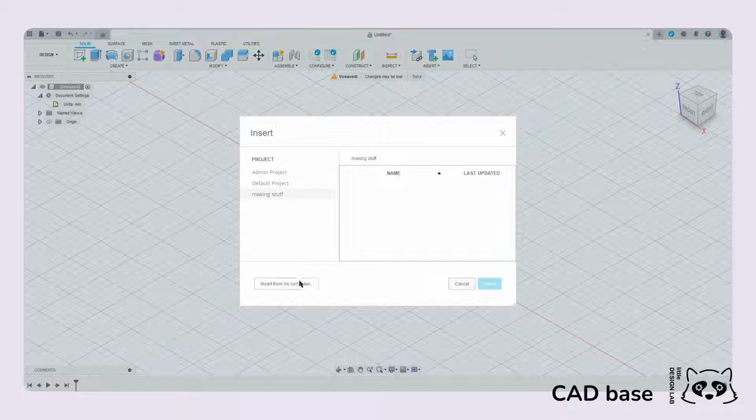In order to start our CAD model, the first thing we're going to do is bring in the sketch we did before. I took a screenshot of it earlier, so I'm going to insert it so we have something to reference. I'll leave it off to the side because I don't want it to interfere with my main drawing. Now we have our drawing to work off of.

Like most things in Fusion, what we're going to try to do is start with a sketch. We'll extrude that sketch into a solid, and then modify that solid further to get the full geometry of the part we want. So let's start with the basics: a basic outline of our waffle knob, working on getting the geometry of the base and the pointer to what we want it to be.

So let's start with our sketch. Again, I want to work on my XY plane. That brings me to this orthogonal view, which is nice, and I can start drawing. I'm going to start with our circle, using my origin as the base.

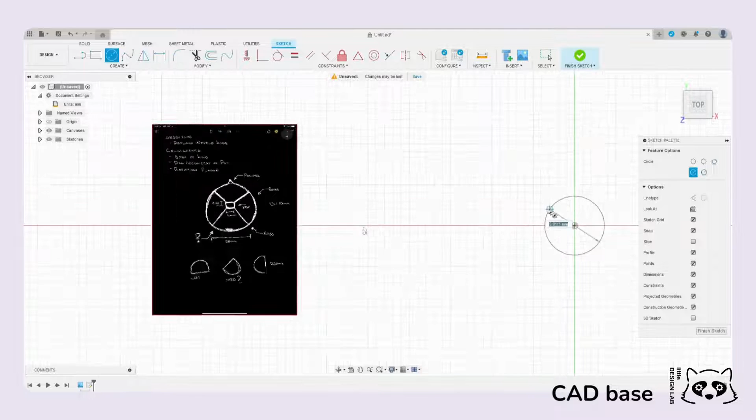Typically, when working parametrically, we don't want to specify all these dimensions up front because we can get too constrained. However, because I already know what dimensions this is going to be, I'll just go ahead and set it, so it's set and we can sort of forget it for now. It's 28 millimeters, we'll leave it at that. Of course, because it's parametric, I can always go back and change this if I need to, but since we know the dimensions, we'll leave it as is.

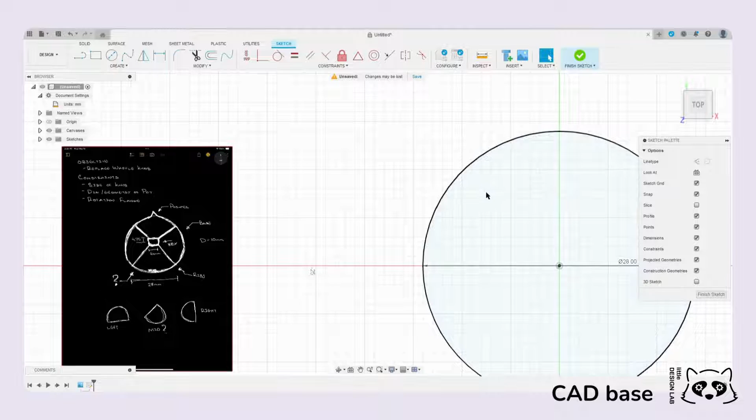The next thing I'm going to work on is making this pointer. I'll start with a reference line, because everything is going to be symmetrical, I need this just to help keep things organized. Right now this line is set as a normal line, so I'm going to change it to a center line. That way I can reference it, but it doesn't get in the way of my geometry, which is exactly what I want.

Right now there are a couple of constraints applied to this: a vertical constraint that keeps it straight up and down, and a coincident constraint to keep it attached to the circle. If I move this, you can see it still moves back and forth, which is fine if that's what you want, but I want to make sure this stays in line with my center point. So I'm going to add one more constraint and make these all coincident to each other. That way, now that they're coincident, I won't be able to move these things back and forth, so they stay in line with one another, which is exactly what I want.

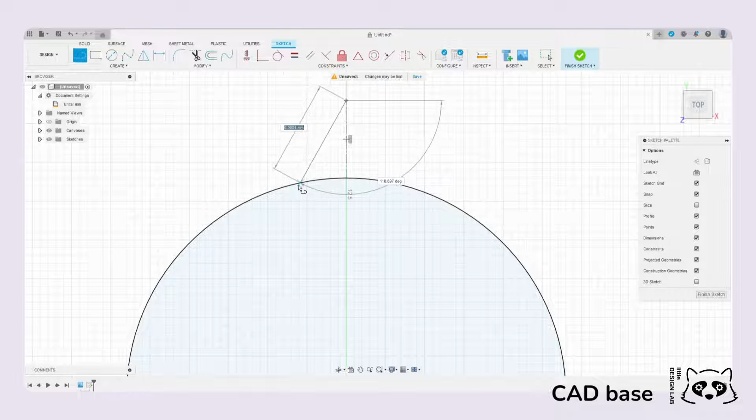With that done, I can add one arm of my pointer. I'm going to snap it to my point here so that it refers to that, and also snap it coincident to this circle so it follows the circle regardless of what dimensions I end up changing it to. And there we go. Now I can change this up and down, move it back and forth, and it'll stay attached to the circle, which is exactly what I want for my pointer.

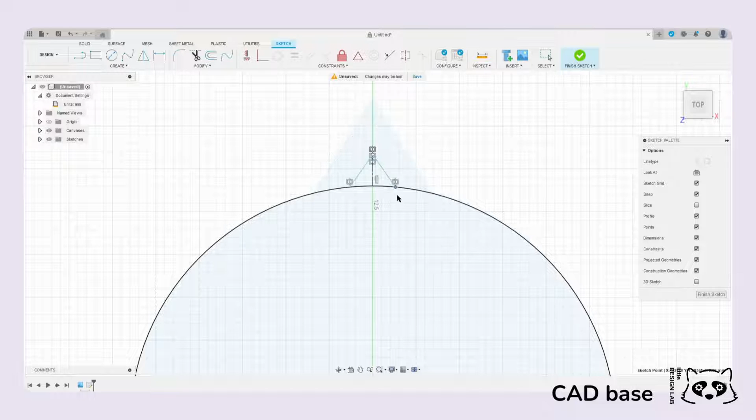What I do to one side, I want to do to the other side. So this is part of why we have the center line. I'm going to select my line, mirror it, and select the mirror line that I want. And there we go. Now I have a perfectly mirrored pointer, which again, you can see they added a bunch of automatic constraints for me so that if I start to move these points back and forth,

it automatically keeps it all in place for us, right? Which is great. We could just sort of leave it at that and be done. But there's a few more things that I actually want to do just to give me a few more settings and a little bit more control of what's happening. Sure, I can just go back and adjust these things by eye if I wanted to, which is perfectly fine for if that's what you want to do. But I want to try to add a few more features to this to just give me a little bit more control.

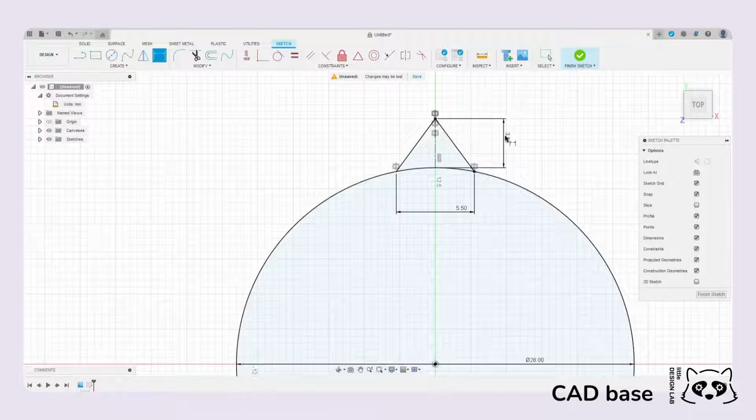So the first thing that I want to be able to do is control the height, or specify the height, and I also want to be able to specify the width of these things. So what I'm going to do is add another measurement constraint here, right? That allows me to then specify exactly what dimension I want there. I also want to specify the width, and now I can go back and adjust it based on exactly how high, how tall, or how wide I want this to be, and make those adjustments as we go along, okay?

One more thing that we're going to do before we extrude this. Right here, we have these very sharp points. For the most part, because this is a relatively small part, it's probably not going to matter that much. But typically, I do like to fillet all these corners because it just makes the geometry a little bit nicer to work with.

So what I'm going to do in order to actually fillet that, I need to trim this part out. That way it knows where to start and begin that fillet. So I'm going to break this circle into a couple of parts there, and change that and break that. And so now we have these two pieces. I'm going to convert them into construction lines because that's just what they are now, my construction lines. And now I can go ahead and fillet these two corners.

Fillet this corner here and fillet this corner. Let's say 1 is fine, maybe 1.5, we'll make it a little bit bigger. And so it's nice and smooth across there. I'm going to do it for this side as well. Fillet this corner here, fillet this corner here.

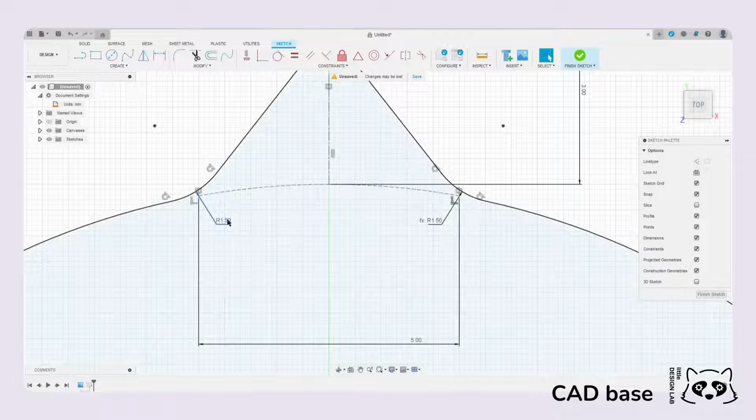You can see that these two are actually two different dimensions right now. I'm going to leave it as two different dimensions because I'll show you there's probably a better way of doing this, but the only way I figured out how to do this is now I want to define what this radius is. I can click on that and define it as this dimension here by clicking on it, which is D4. I can type in D4 or just click on that, and you can see it's updated this to be D4. So when I hit enter, it constrains it to this same dimension, because now if I change it to 1, it updates since this is actually referencing this dimension here.

So that way, everything is nice and symmetrical for us. Let's go ahead and turn this back to something a little bit bigger because I like that smooth curve. That looks like it's okay. It's a little bit big for what we're trying to do. Let's go ahead and make this maybe just a tad smaller. Let's change this to 2 millimeters and let's make this maybe 3. And let's start with that, all right?

We'll sort of play with it as we go along, but I think that looks a little bit better for what we are trying to do for our waffle knob. And that is the majority, that should do it for our sketch here. We can finish our sketch.

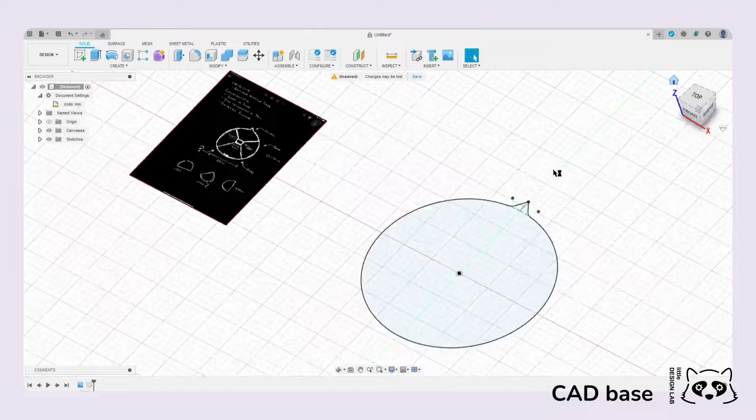Now that we have our main sketch, we can start to manipulate this or turn this into a 3-dimensional solid. So we have our 2D drawing, we're going to extrude this to turn it into a solid. I click on extrude, click on the body that I want, the sketch that I want, and it's automatically figured out this is what I want to extrude.

We found out earlier that we want to make it about 10 millimeters. So I'm going to hit 10 millimeters and there's our solid. So here's our big solid.

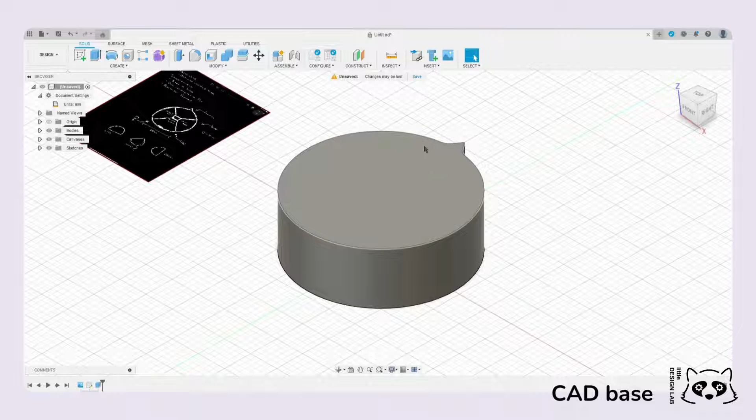We could have just left it like this and then probably cut out the internal circle for this key, but because I want to be able to add a few more features and make this a little bit more compelling as a design, I'm going to hollow this thing out and make a shell of this instead, and then add in these ribs afterwards.

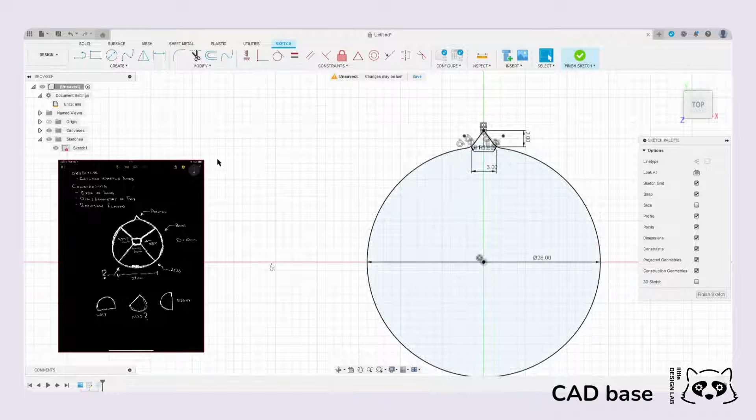Again, there are always multiple ways of doing things. I could have gone back to my sketch and offset this circle out and then just extruded the shell of it. But I think there are easier tools for making that shell - literally a shell command.

So if I go to modify, there is a shell command that I have. Click on the surface that I want to eliminate, which is this top surface. It's asking me how thick I want to make the shell, and I think maybe 1.5 millimeters might be good. You can see that there.

Again, if I want to change it later, it's easy to change it. Part of what's nice about it being parametric is I can go back and update these things fairly quickly. So I can say 1.5 isn't really enough, maybe I need to make it a little bit thicker because of how thick everything is going to be. I can change that to 2 to thicken that up if needed. Double click this, go back and leave it at 1.5 for now, and we'll see how that is.

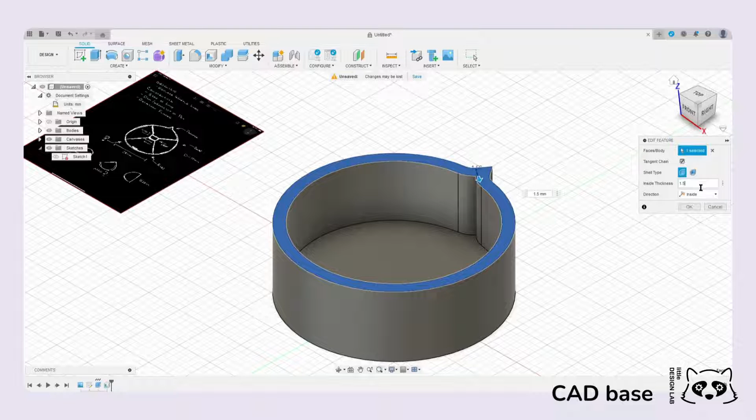So that gives us our main geometry for our shell and our knob. From there, we'll add the other features in the next little part here.

One thing I forgot to do earlier was actually name my sketches. It's really important to keep things organized as we go along because we're going to be building off of these things and will have to go back and refer to it. So I'm going to rename this so that when I need to come back to it, I know what we're talking about.

So this is our base, I'm just going to call it our base, and then we're good to go. Now that we've done that, you can see in our timeline, that's our base. And so now we have that, and we are good to go.

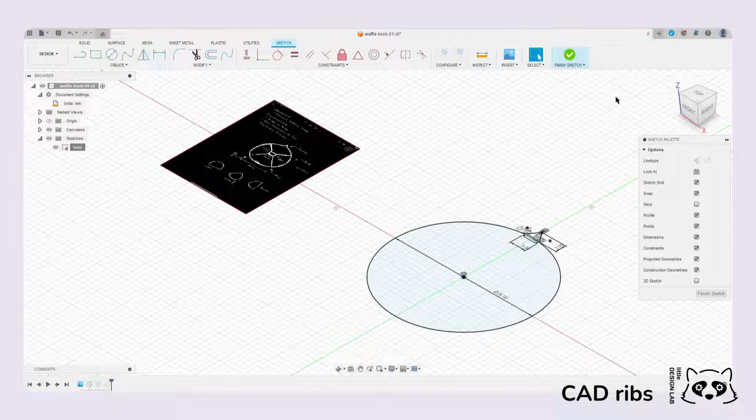Next thing we're going to work on - we could either do this key here, or we can do our ribs. But we're going to do our ribs first. To do that, as always, we're going to do a sketch before we extrude and modify it. So I'm going to make another sketch.

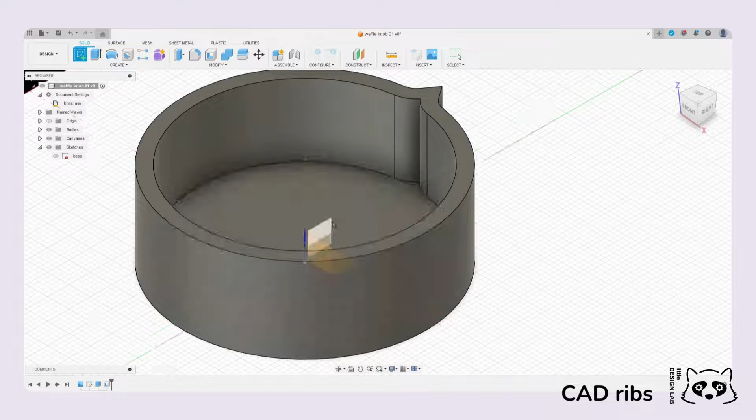In this case, as always, it's asking me what construction plane I want to work off of. I could use the bottom construction plane on the XY construction plane. But what I really want to do, because I know I want to continue to build off of this bottom plate of the shell.

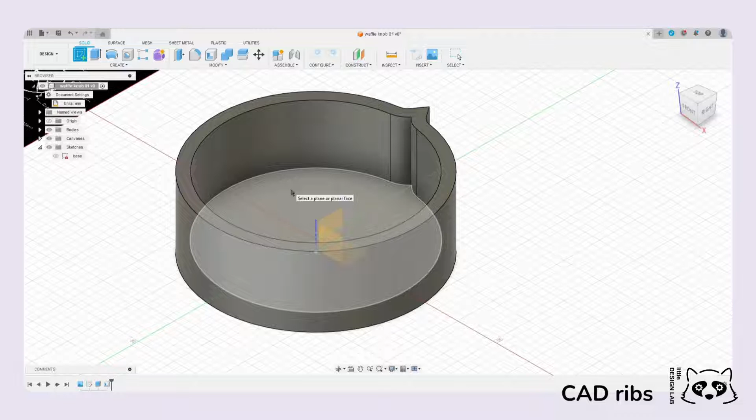If I thicken this later, I want to make sure it still continues to reference this plane and moves with it. So I'm going to select this plane to make sure that's what it's referencing when I make my ribs. Now it brings it up, and you can see it refers to this geometry as our reference plane.

In order to make our ribs, we're trying to make this symmetrical across these axes. So I'm going to set up a couple reference lines for myself. As usual, start with the origin, make a line like that, and turn this into a construction line so I have something to reference, because I'm going to make it symmetrical across that axis.

I'm going to draw another reference line, this time just off to the side somewhere. Then again, turn this into a reference or construction line. Those are our two reference lines.

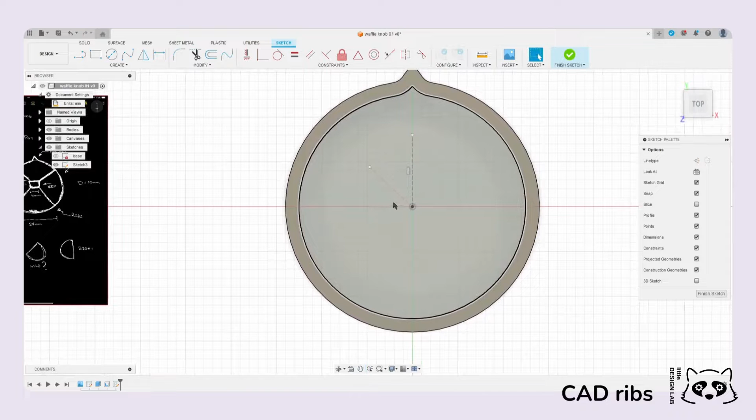From here, there are many ways of achieving the same goal. The way I'm going to do this is by offsetting this reference line so that I have two edges of my rib. I could also make a rectangle and extrude that, but there's some weird geometry that happens when you do that.

So instead, I'm going to take this line and offset it by clicking offset, and we get our first offset line. Now that I have that offset line, I'm going to try to extend these things so they're coincident with this arc or this circle.

But I can't quite do that yet because there's a constraint here keeping me from manipulating these things. I can rotate it but not really change it because it's referencing this line. If I move this back and forth, I could do that.

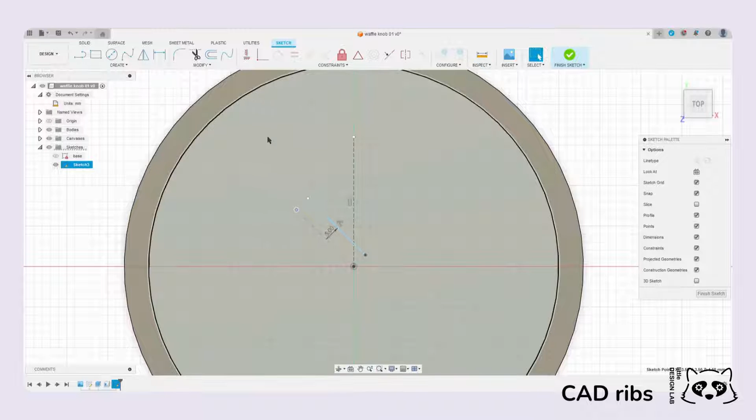What I actually want is for this point here to be coincident to this circle. So I'm going to release this constraint by clicking on it and deleting that specific constraint. Now I'm free to adjust these endpoints as needed, so I can make these changes a little more freely.

Now I want to make this point coincident to this circle - you can see it snapped to there. Then I also want this point to be coincident to this other circle, and now it's perfectly along that edge, which is exactly what I want to have happen.

If I continue to change this dimension here, say I want to make this a lot wider, I still want this to be coincident to this circle. If it wasn't coincident, it would actually cut into the shell here, which doesn't really matter much for how the program handles these shapes and geometries, but just to make things a little cleaner, I want to make sure it's coincident so it finishes nicely.

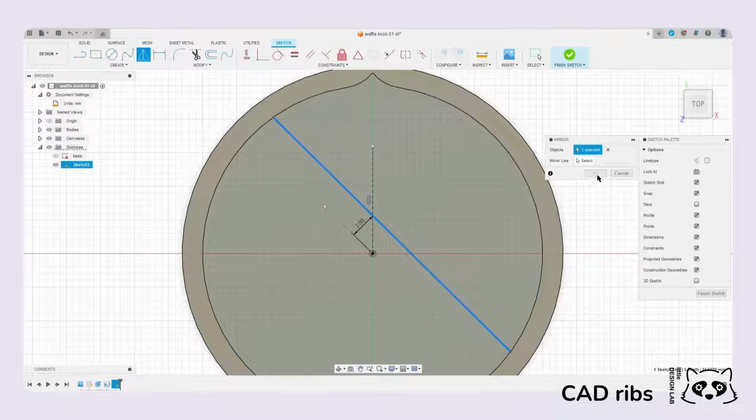So now we have that line there. We want to mirror it across here so we have a nice rectangle or rib to work off of. As usual, I'm going to click on that line, mirror it, and select the mirror line, which is the reference line we drew earlier. We'll say OK, and we're good to go.

Now I have these two points. As I rotate it, you can see it remains coincident to one another and parallel to one another, as well as being able to change these dimensions to make it thicker or wider as needed.

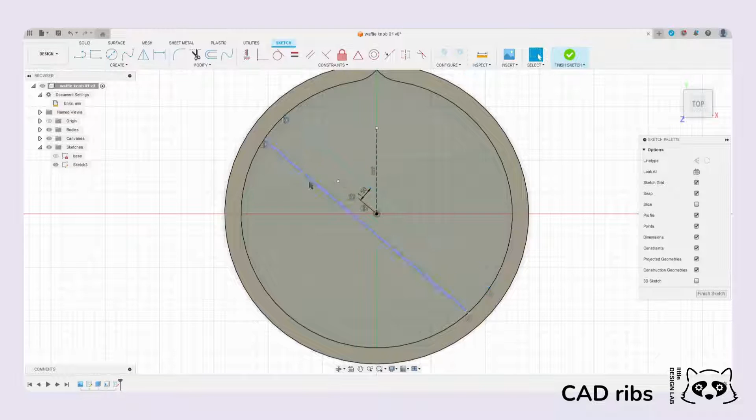All right, we're good there. The last thing we're going to do is mirror this across here so that it's nice and symmetrical. I'm going to do the same thing where I take my 2 points or 2 lines and mirror it, and this time the mirror line is the first one I set up earlier. Hit OK.

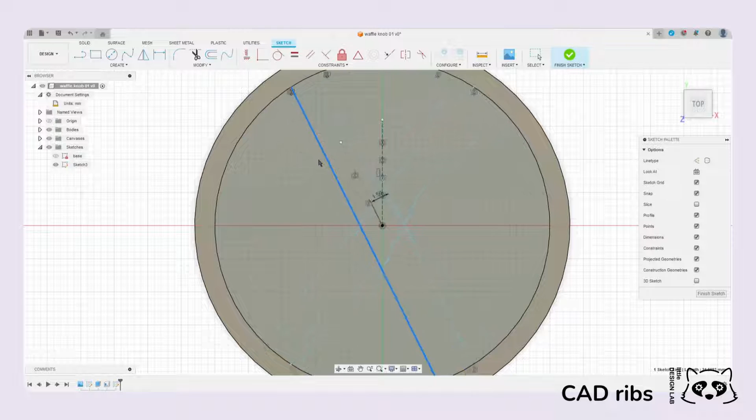Now you can see it's nice, I have all these points and I can rotate these freely. I can continue to thicken these if I want and make these ribs bigger or smaller depending on how much structure I need later.

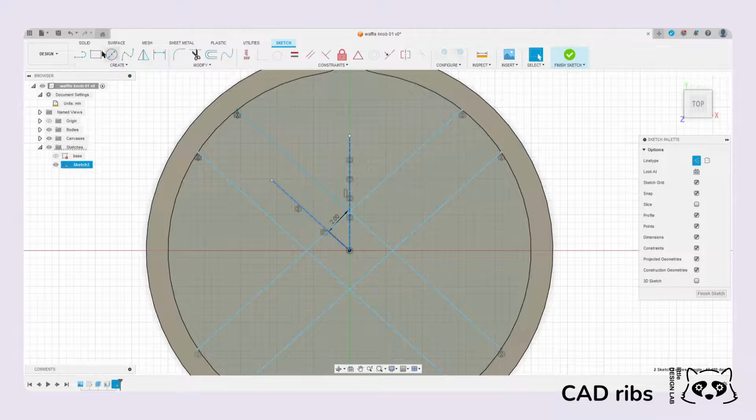One last thing I'm going to try to do is, I can just eyeball the angle here, which is fine, but I'm going to add one more constraint to these 2 construction lines I made earlier so I can define exactly what that angle is going to be.

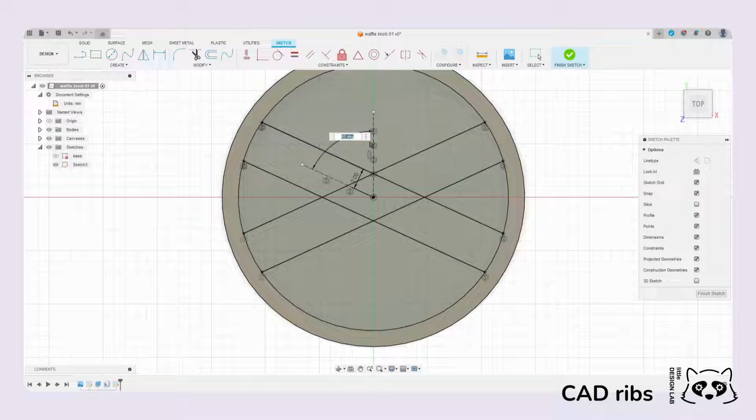If I click on measure, I can define this angle. Now when I define that angle, it gives me another set of controls to manipulate this as we go along, whether I want it more shallow or more acute. I can just change this on the fly as we go along.

Okay, now that we have the sketch, I'm going to finish my sketch. I'm going to rename my sketch so I keep this organized. This time I'm going to rename it 'the ribs.' And now I have that.

Now that I have my 2D sketch done, I can extrude them so I have my solid ribs. I'm going to go ahead and extrude, click on my extrude tool. I can reference these points or the geometry I made earlier. I want this one, this one, this one, and this one, and this one, which Fusion does a really good job of deciding what you want to do.

What's really nice about drawing all these things is that you don't have to be super precise when you make your initial sketches, because you can come through and just pick what you want to make happen. Then when you turn it into a solid, you can manipulate it from there. That's why for a lot of parts I just kind of sketched as I went along, because it didn't really matter that much.

Now that I've selected the objects I wanted, there's a couple different features I want to highlight. As usual, I could just define what that dimension or height is. I know this height was 10 millimeters earlier, and this shell was maybe 1.5, so I could subtract those two things and say 8.5, so this lands flush to this ring.

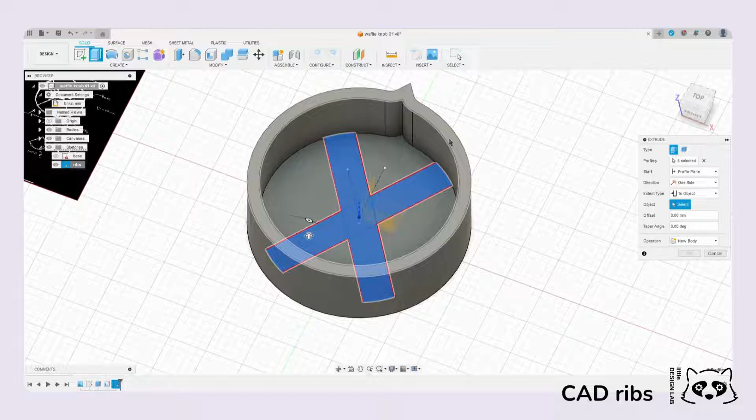But what's much easier is I can actually reference that. If I go to my toolbox here, I can choose how far, right now it's set on distance, but I'm going to choose to extrude to the object, and select the object being this face, and voila, it clicks to there, and you can see how it's extruded to that top face, which is nice.

So if I go back and change the height of this geometry later, it will also change the height of that, and everything will be nice and set, and I don't have to go back and do the calculations again. One last thing I actually want to do is, I don't want it to go all the way to the face—I want it to recede a little bit.

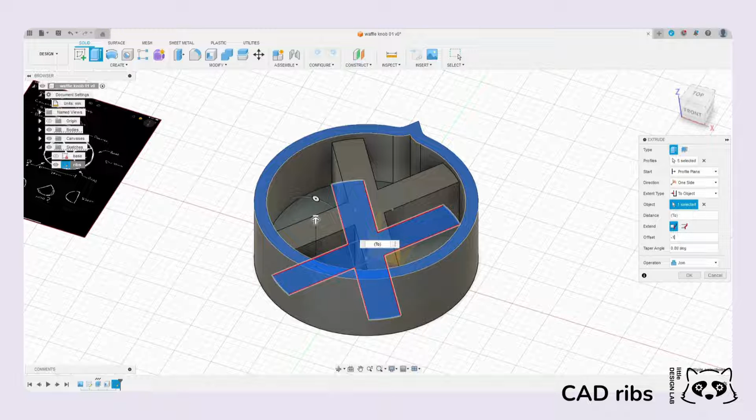That way there's just a little less friction on the surface, so less things to sort of get caught. I'm actually going to offset the top a little bit, just by -1 millimeter, or maybe 1.5 millimeters. That way it just sort of recedes back a little bit.

The other thing I'm doing in terms of the operation is I want to join it together, so that it's all one object. Because eventually when I go to 3D print this thing, I want this all to be one object. So I'm going to join these all together so that it's one. Hit OK, and there we go. We have our ribs and our main shell all put in place.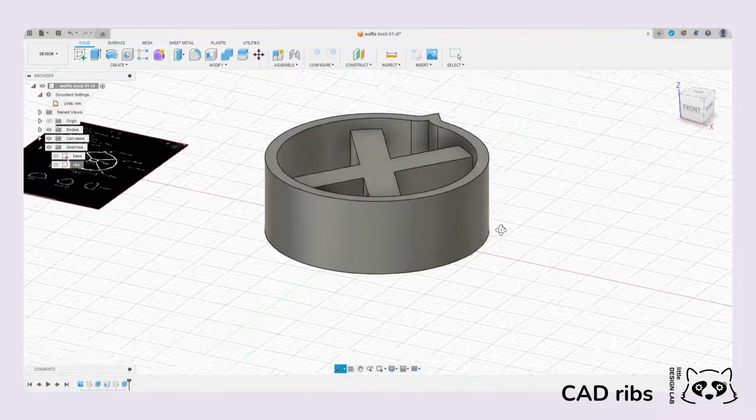If we need to, eventually we can go back and do these manipulations. I feel like this angle is a little too severe. I don't really like that angle very much. So let's go back into the sketch real quickly and change that angle.

Let's make this a little bit wider. Maybe let's do 50 degrees. And that looks a little bit better. I like that, let's do that.

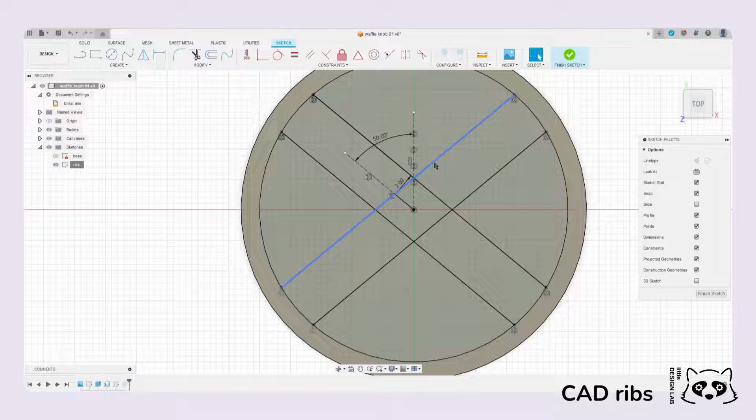Finish my sketch. And again, what's nice is that everything just automatically updates. I don't have to go back and do a bunch of edits. Just change that one parameter and we are good to go.

So that looks good, let's do - yeah, so that's good. We're going to work on our little key next.

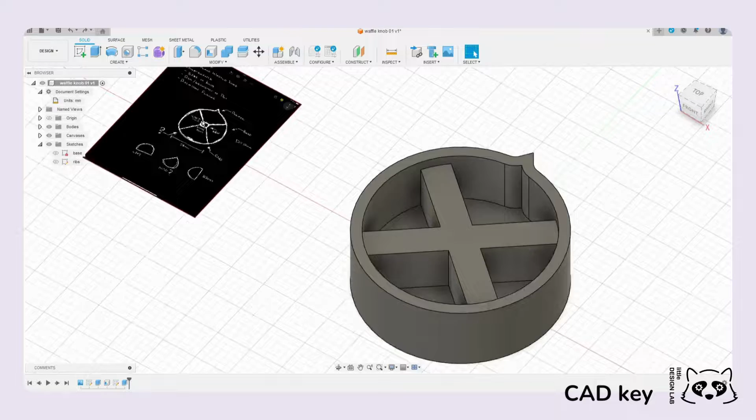Now that we have our ribs, we can go ahead and add our key to our waffle knob here. So as usual, what we need to do is start a sketch. There's a couple different ways we can go about doing this. Right now, if we start a sketch, because we have the ribs in place, it breaks apart all these different features into these different regions.

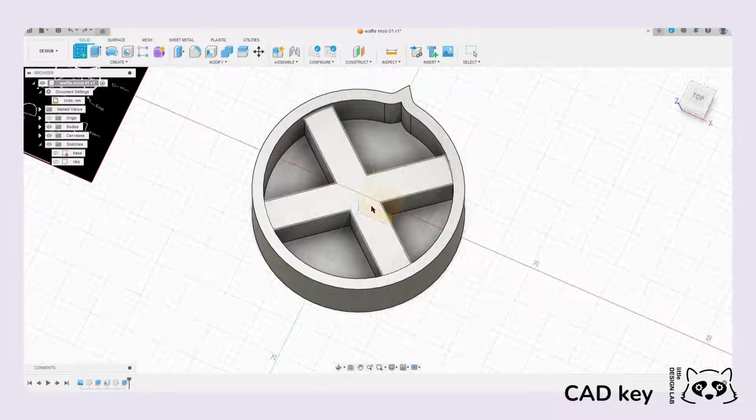And that's fine, we can do that. Let's go ahead and click that first and see - alright, we can work on that. But as you can see, having this rib here in place, sure we can draw over it, but it's just sort of messy. There's a lot of things in the way.

One way we can deal with that is actually projecting. If I go to create and click on project, I can project this exterior. I can even just select this line if I wanted to, but if I select this face and project that to my construction plane, I can have that as a reference, and then turn off the body, and now I have a much cleaner workspace to work off of.

That's definitely one way to do it, but you can see it still breaks it up into these smaller regions, which I don't love. So let's go ahead and do this another way. I'm going to undo back a couple times and show you a different way of doing this.

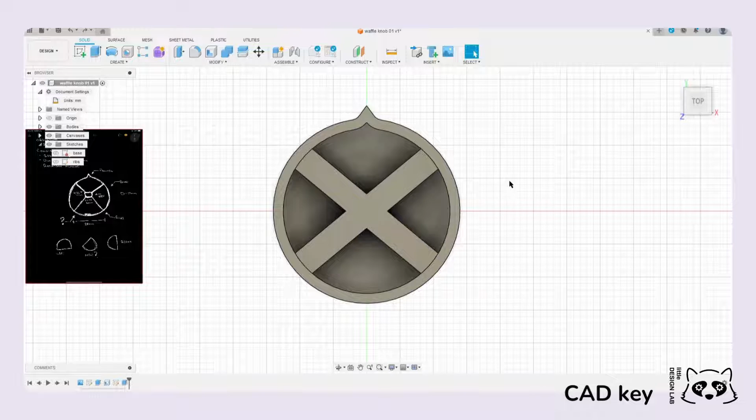The way I'm going to do this instead is actually use this timeline down here, which is again a really nice feature, where you get to decide that, alright, well, I made these ribs already, I don't want to delete them. So instead, maybe what I should have done is actually made the key first. So what I can do is literally go back in time to before I made that sketch. It's still saved, it hasn't gone anywhere.

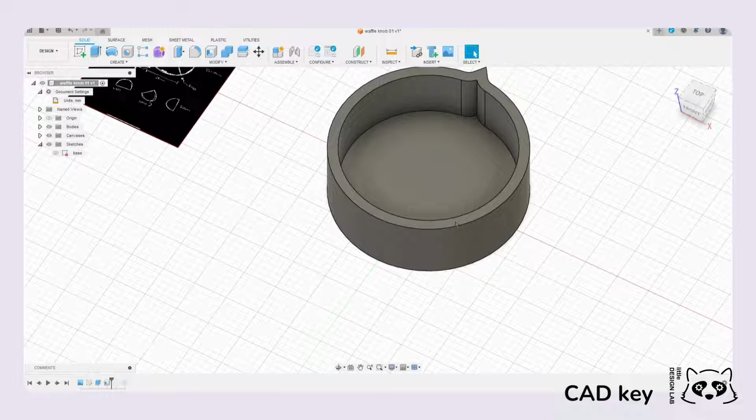Instead, I'm essentially going to just build that key first.

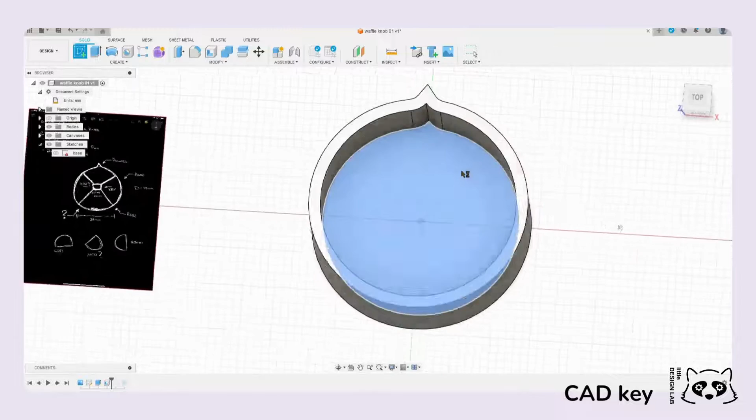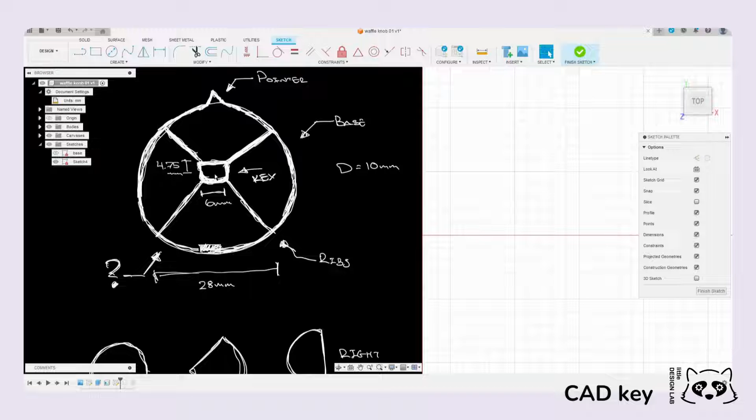As if I never thought about what was going to happen with the ribs, let's just build off of that instead. Let's start my sketch again. This time I can select that same face as before, and it takes me back to this feature with a nice open workspace to build off of. This is pretty simple geometry, not much to it. We have the dimensions we got from the physical object earlier.

So we'll make a circle coincident to the origin, nice and simple. We know the diameter is going to be 6 millimeters, so we can type in 6. Voila, nice and easy. The next thing we want to do is add this flat element to keep the potentiometer from spinning on itself, or rather keep the knob from spinning on the potentiometer while still allowing it to turn. The way I'm going to do that is add a construction line.

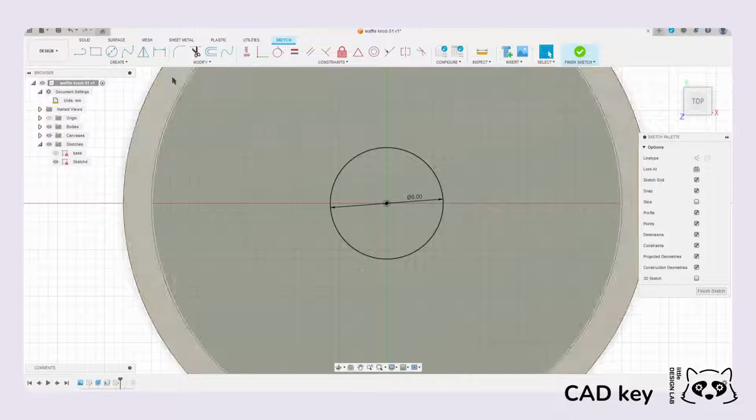So I draw my line, coincident where it should meet the y-axis. I'm going to draw that up and enter 4.75, and that should hopefully be constrained to those points. I want this to be a construction line, leave it as that. That should be good. It's constrained vertical, so hopefully all that stuff stays in place.

I'm going to add this horizontal line across so that it's coincident with the circle again, and also perpendicular, which is nice. Now I'll extend it so it hits all the way across. I can click on extend - where is my extend tool? It should be up here somewhere - Modify, extend, and extend this line, and it should automatically read to that circle.

So we're good. I want to delete this part because I really just want this region, so I can go ahead and trim that away, and we're left with just the key that we want.

So now that this is the interior region, we need the shell on the outside, right? In order to do that, I'm going to offset this so I have a nice shell to work with. I'll click on my offset tool, select the region I want, and offset it at 1 millimeter for now. I think that might be okay - I probably actually want it a little bigger, but let's leave it at that for now. And that's our 1 millimeter.

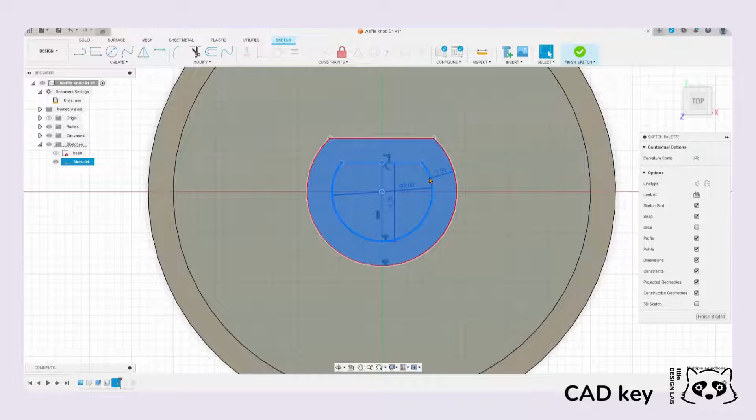For whatever reason, I noticed that when I rotate this element here, it breaks this constraint and I can't easily offset it anymore. I'm not sure why that's happening. Instead, I'm going to add a couple of my own constraints so I can fix that more easily in the future. So I'm going to delete that constraint, and delete these offset constraints so these elements are free to do their own thing, okay? But I still want to make sure they're acting together.

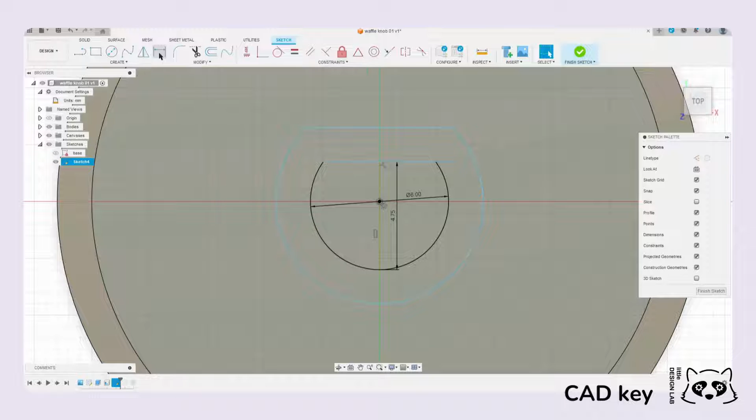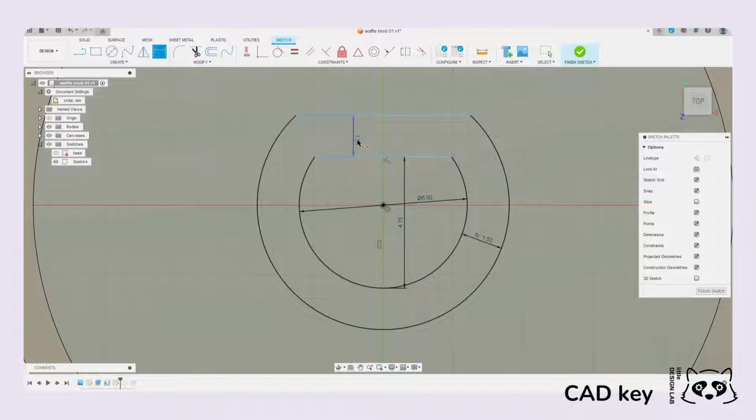I don't want to have to go through and manipulate a bunch of different parameters, so I'm going to add a dimension constraint here and here, and also add a dimension constraint from here to here. Then I'll use my trick from last time, where I define this dimension to be the same as this dimension. I click on this, and you can see it refers to this dimension here, and hit enter. Now when I change this dimension, it will automatically update this one as well.

Again, I don't know why it breaks when I rotate it, but that's the fix I decided to use to adapt to this. So I could go back in - as I said, I want to be able to rotate this to make adjustments as we go along.

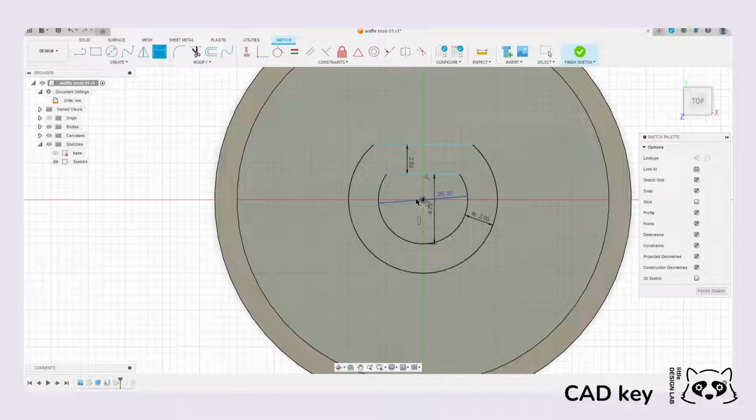I can go through and add a couple dimension or construction lines and then make the angles, but it's probably easier if I just select this whole thing, go up to my modify tool, and rotate this. Then based on that, I can rotate it as I need.

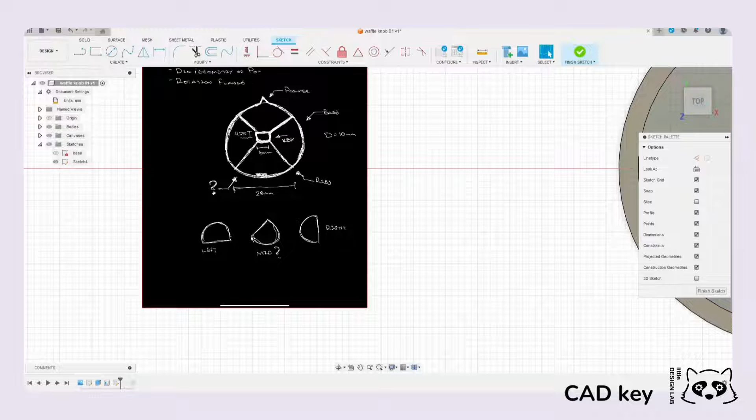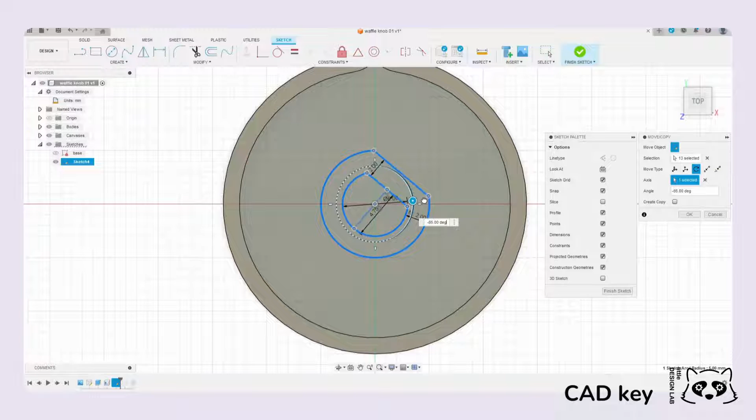Looking at what we said earlier from my rough estimation, I think it's fair to just start with 45 degrees. Now that I'm looking at this, I probably have to rotate it around because we're looking at the underside. So let's rotate this the other way, negative 45 degrees around this way, which is negative 90 there. Hit enter, and now when we flip it over, yeah, I think that makes more sense.

So we are pretty good there. Like I said, that's a pretty simple one, pretty straightforward.

Let's finish our sketch and make the modifications to our extrusion. I'll finish my sketch, go back to my home view. What's really nice about all of this is that, like I said, I just inserted that before I made the ribs, so I can skip forward and my ribs are still there. I haven't had to change anything. Everything is still there, it's still good.

It's a nice little feature that allows me to go back if I made a mistake before and just update that. So let's change our sketch name as usual to make sure we have all of this stuff in line and organized. I'm going to change this to key, hit enter, and we're good there.

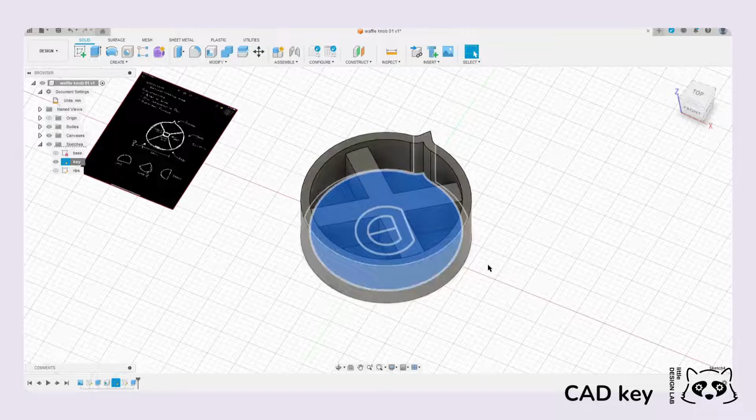The next thing we're going to do, as we did before, is make the extrusion. But before that, we actually want to clear a bit of space here. The ribs are obviously in the way, we don't want that to interfere. We want it to be a nice open space so I'll be able to insert the potentiometer in there.

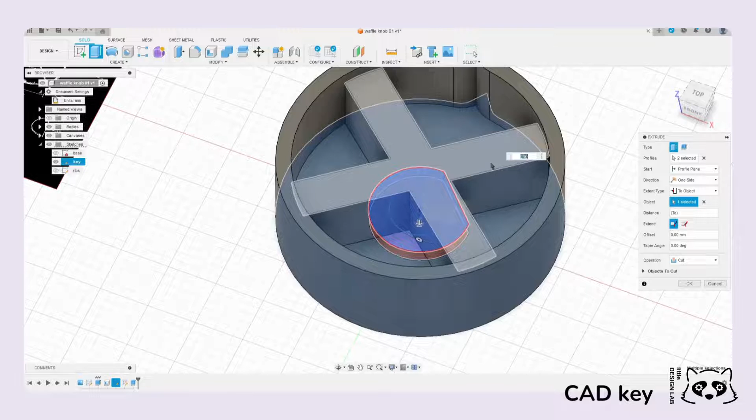So what I'm going to do is still an extrusion, but the difference is in one of the parameters: I'm going to select both this and this, and when I extrude to an object, I'm going to select this surface so that it clears that space for me. The difference from before is that instead of joining this, I'm going to cut this. When I cut this, you can see it essentially makes a hole in the center for me there.

So now I have space to go back in and add the actual key for where the potentiometer will sit into it. I need to bring back the sketch that we did earlier, so turn that back on.

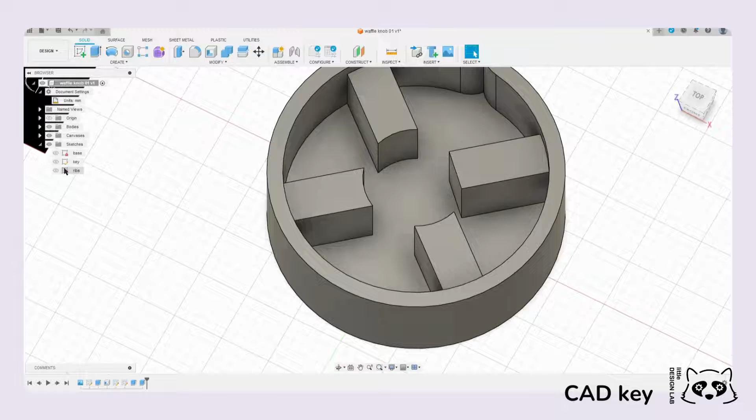I'm going to extrude that one more time. This time I'm just going to extrude that offset, and I want to extrude it to the face of this surface. This time, instead, we're going to join it so it becomes part of this whole object. Hit OK, and there we go.

And now we should have the majority of our waffle knob, right? We have the main components: our base, our little pointer, our ribs, and our key.

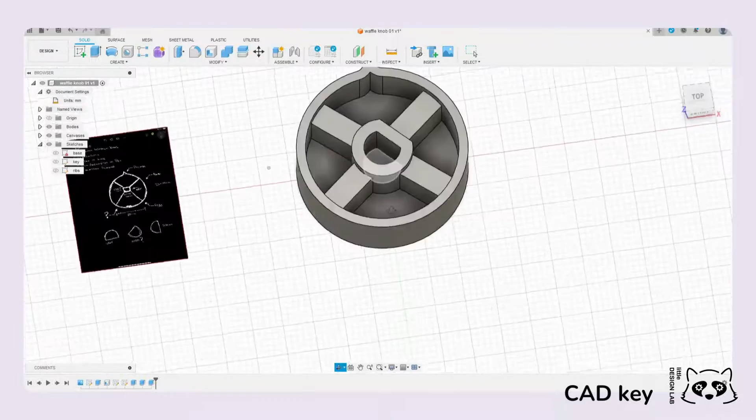There's a few more things we want to try to do, just to add a few more nice features to it. But honestly, we can probably print this, check it, check some of the dimensions, see where it's at, and go from there. Before that, we'll do a couple more things, including the little surprise I had earlier, before we send this to the 3D printer.

All right, we are almost done with this waffle knob. We are almost ready to print. There's only a few last features that I want to add, and then we should be good to go.

The last major one will be the little flange that I always keep forgetting to add, but we'll add that real quickly. We'll add a couple fillets to make sure the geometry is a little bit more smooth and a little easier to handle. And I got this last little feature surprise that I would like to include.

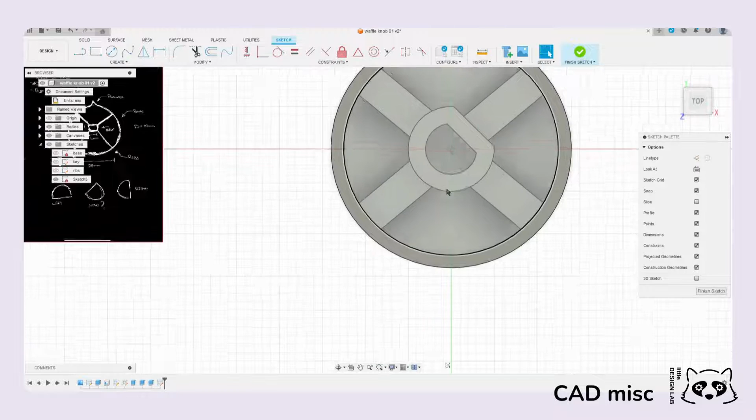So let's go ahead and quickly add this flange. Let's do our sketch per usual. I'm going to use this top surface because that's where I want it to land. This geometry is going to be pretty straightforward. I'm going to add my center point because it's going to be symmetrical.

Turn this into a construction line. From that construction line, I'm going to add another line that is coincident to the outside circle. I want to mirror that across my center line that I added earlier.

Oops, I'm going to mirror that. First, I'm going to select the object that I want. Then I want to select the mirror line. Hit OK. Object is this thing, and we should be good to go.

What I want to do now is, I actually don't want this entire surface. I just want kind of like half of this thing. So what I'm going to do is make an arc and offset that arc.

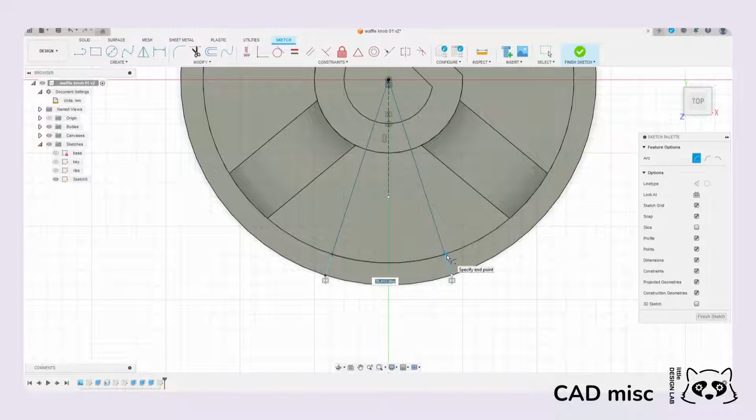I'm going to go to create an arc. I want to use this center point one so that I can click the center here. Go to this point that's coincident to that arm, and then coincident to that arm, and now I have my arc, which I can then offset.

And then I will offset it, let's say 0.5 is probably good, maybe a little bit more, let's say 0.75. Let's start with 0.75. These are going to be construction lines because I don't want them to interfere with the actual geometry, right? But I do need lines so that I can close off this region so that I can extrude it later.

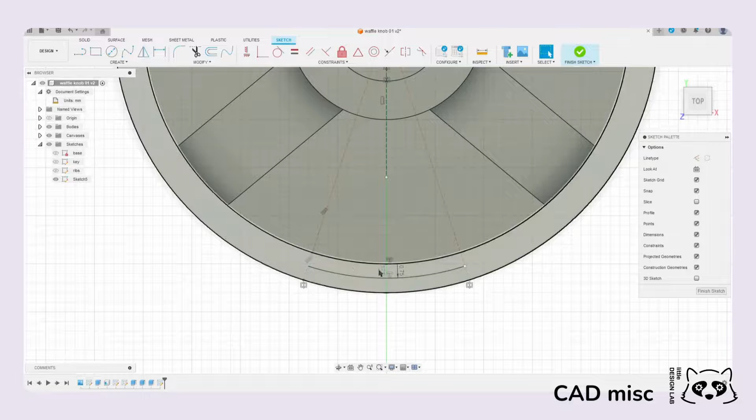So let's go ahead and just add that line there. Oops. Add that line there. Did I add a line? I don't know, I didn't. I'm going to add that line that is constrained to this point and that, and then this point to that point, and we should be good to go with that.

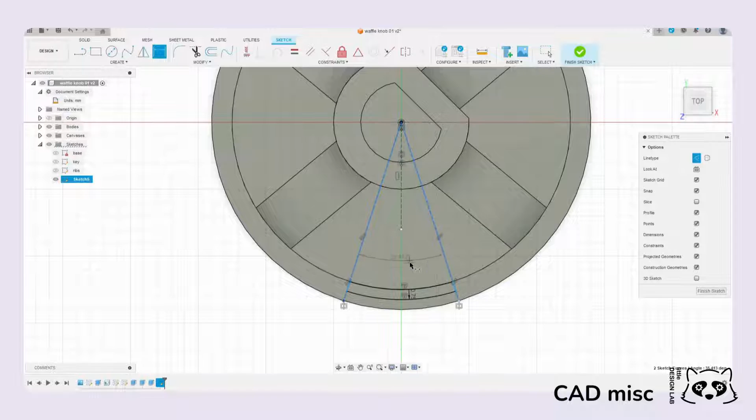Last thing I'm going to add this angle in here so that I can change the width of that really quickly. So select this angle arm, select this arm. It should automatically know that I want to make that into an angle.

Let's make this a little bit smaller. Let's say 25 degrees, maybe even smaller. Maybe let's start with 20 degrees, and then that's good. That's all that we need to do for our flange sketch.

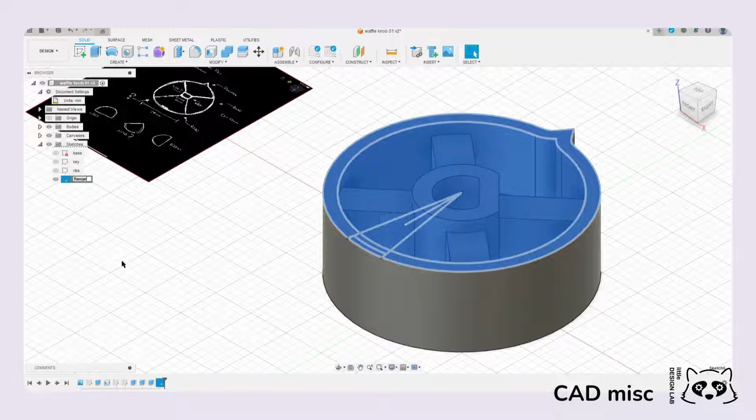Because once we're done with that, we should be able to rename this flange, and then when I go to extrude, I can go ahead and simply select that region. Let's say 1 millimeter is probably good, and then we have our flange.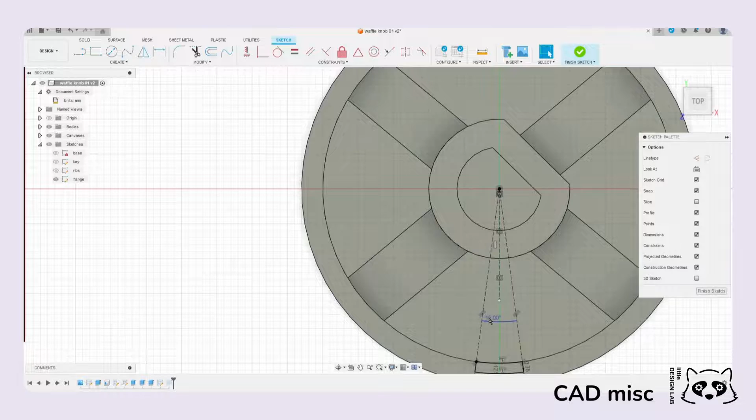That still looks a little bit wide. So let's go back into our sketch real quickly, change this to 15 degrees. Yeah, 15 degrees. We'll start with that, see what happens, and then we'll go from there.

Cool, so we have our flange. We're good, that's probably all our major geometry. Now we're just going to fill out a couple of these corners, like I said, so that the geometry is just a little easier or a little nicer to touch and hold.

Let's fillet these outside corners. I'm going to select my fillet tool. I'm going to select these outside curves because I want them to be the same. So when I select the same objects, they'll all stay in the timeline together. So if I want to go back to update that, it'll actually be a lot easier because then I don't have to reselect it. It'll just kind of know what I want to do.

The edge, let's say 0.5 millimeters. Yeah, 0.5 millimeters looks good. The other ones that I want to fillet are actually all these inside corners. I don't really have to fillet these inside corners, but generally speaking, having the fillet around these sort of hard edges does make it a little bit more robust, especially when we're 3D printing. Any sort of sharp edges has a tendency to want to break.

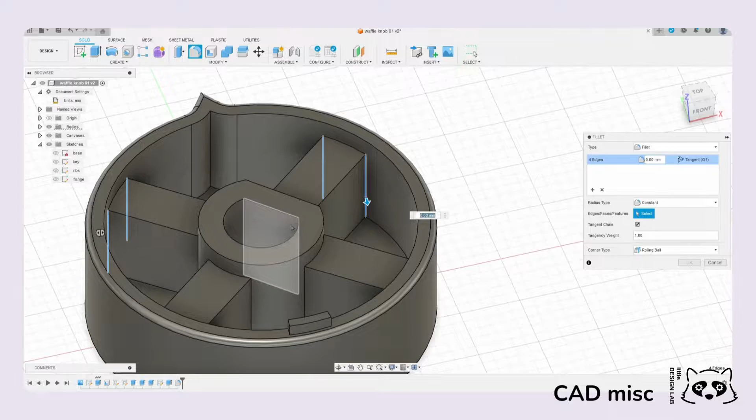I doubt this is going to break, but just for caution's sake, I'm going to go ahead and fillet those corners as well. I'm going to select all these corners. It'll be a little annoying to select them all, but it'll be worth it, because if I need to update it later, I can just go back into my timeline and select that operation, since it will save all of it. You can also go back and update your selection afterward if you forgot something. But I'm going to try to select them all this first time around. One more, a couple more here. We're almost done. We have all our features selected.

I'm going to choose 1.5 millimeters. How does that look? I think that looks pretty good. It could be a little wider, but for now I think that'll be fine for what we're trying to do. We don't want to have to go crazy.

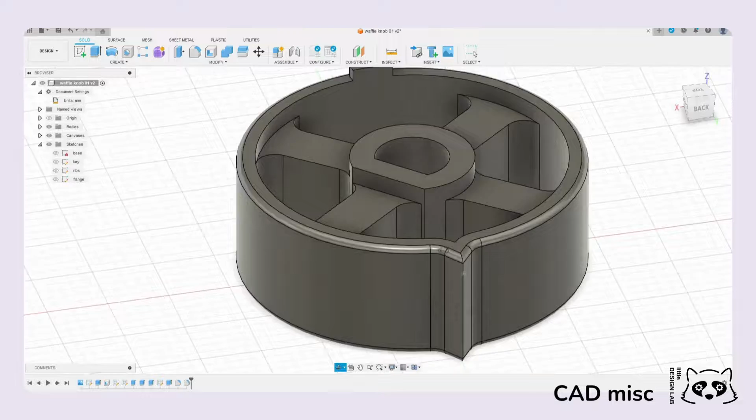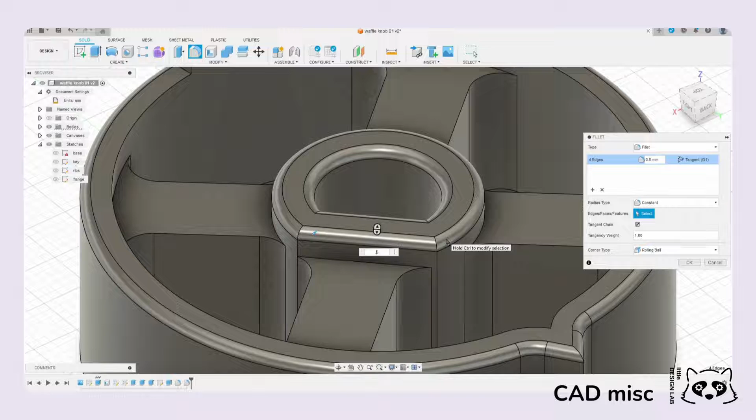The last little one I'm going to add is a fillet in this corner, because this is probably the most important one since the potentiometer is going to actually fit in there. We could probably force it in, but having a nice fillet will give it a little more guidance and make it easier to fit later. So I'm going to select this corner and this edge, and I think I'm also going to make it 0.5 millimeters. Actually, that's too big—let's say 0.25 millimeters, and that should be good.

So that is the majority of our design there. We should be just about ready to go with the 3D print.

The last little thing—the surprise I've been talking about this whole time—since we're making this from scratch and doing our own thing, it's always nice to add a little personalization. So I'm going to add, not a canvas, but a little SVG of, let's see, my little hedgehog.

I'm going to select my bottom face to work with and rotate my plane around so I have my little hedgehog. Those of you who know me know the hedgehog is the little symbol I have for my wife, because she can be a little on the prickly side. So I'm adding this little hedgehog in there for her so it's embossed and a bit more personalized—I think it's a fun little feature. It's always nice to add something that lets you know it's one of a kind.

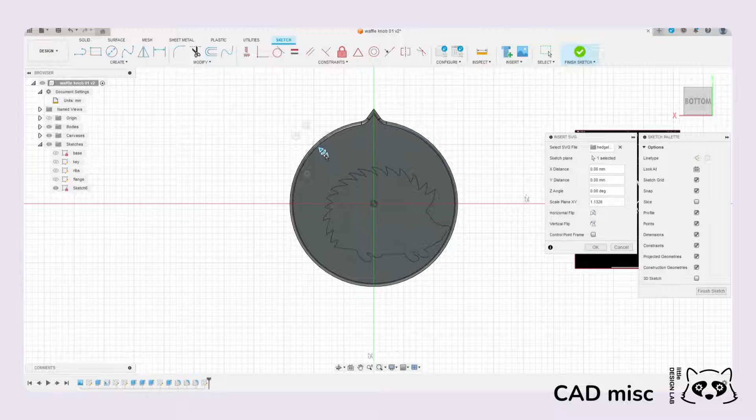So I'm going to try to get this to fit nicely on there. I think that looks about good, right? That looks good—we'll hit enter. Let's go back and extrude that up. Let's rename this to be hedgehog.

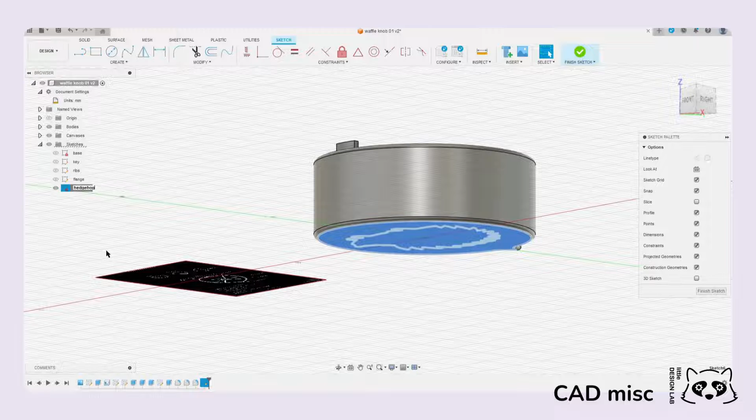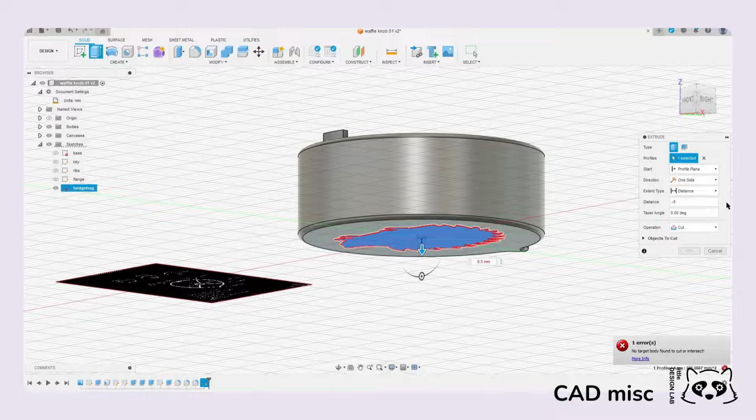Then we can finish our sketch first, and then extrude that feature. I'm going to make that 0.5, and I want to cut it, so I'll actually have to make it negative 0.5, to cut inside of that cap of our knob. You can see it sort of cuts or embosses it underneath, so when it 3D prints, we'll have that hollowed out and should be able to have our knob.

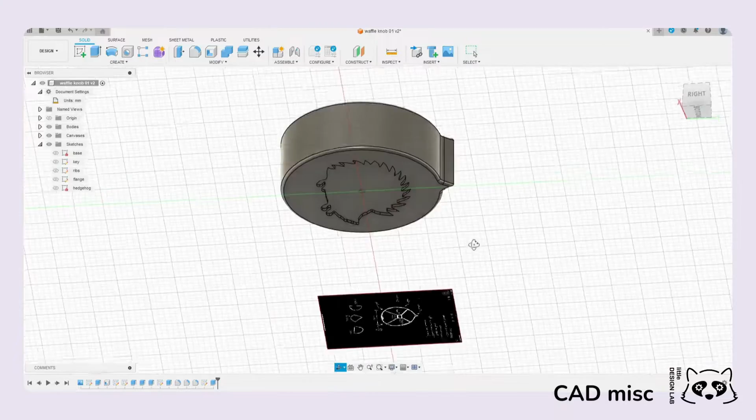So yeah, I think we're just about done with all of this. We have all our major features. It's already set up to be parametric, so I'm sure we'll go back and maybe adjust either this size or give it a little more structure. But we'll worry about that after we 3D print it for the first time and check it.

That's going to do it for now. In our next episode, we'll actually go through and 3D print this, but that should be all the CAD to get us set up.